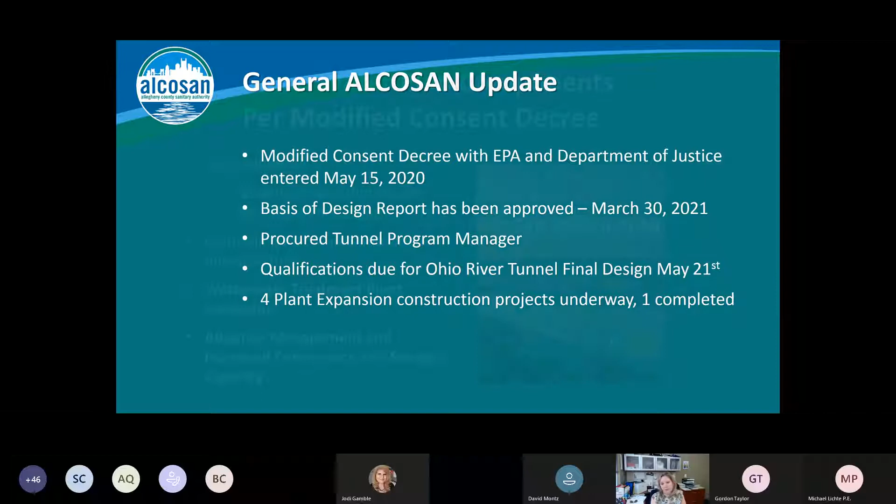And I'm not going to go into too much detail, but you guys know that the Clean Water Plan components are generally split into these 4 categories: the regionalization, controlling the source, and green infrastructure components. Those are not the 2 topics we're going to concentrate on today. The other 2 components, the wastewater treatment plant expansion, and then the adaptive management and increasing the conveyance and storage capacity in our collection system. That's what Mike and I are going to focus on for today's update.

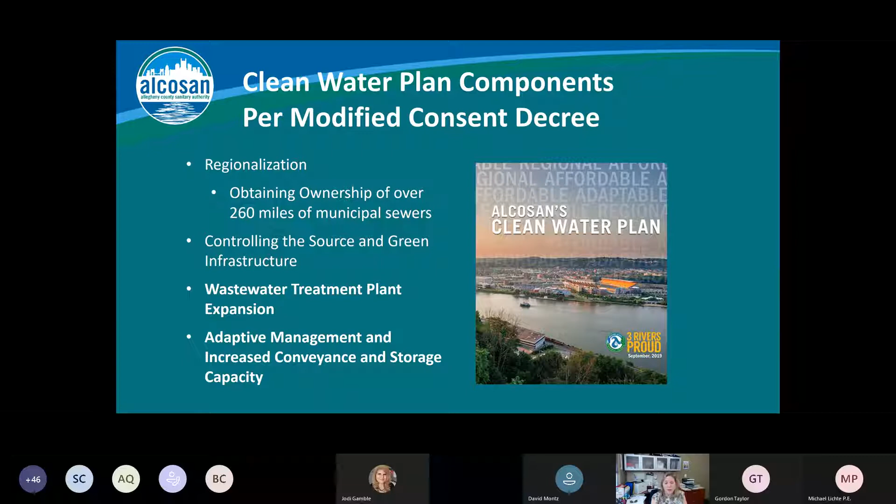But not to ignore that there are two other very important sister components to what we're going to focus on today.

And then just, big picture, what did the modified consent decree do? It bought us 10 more years. We went down to the interim solution based on the affordability limits. But what's important to note here is everything we're talking about, our deadline is the 2036 deadline, but there will be post-construction monitoring beyond that 2036, and then another set of measures to get us to the full compliance.

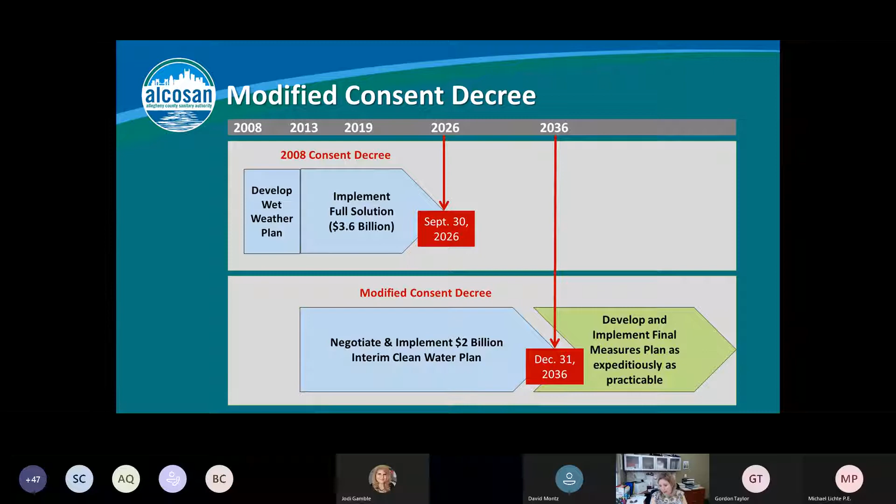Okay, so the treatment plant expansion, lots of construction happening down here at the plant. How will we get there? How will we get to being able to treat 250 million gallons per day now to 600 million gallons per day by 2029?

This is generally big picture how we're going to get there. So we are increasing our secondary treatment plant capacity to get full secondary treatment up to 295 million gallons per day. 2 new final settling tanks, a new chlorine contact tank, and then we're building a river wall about 1,100 feet long to buy us some additional real estate for the construction of those 2 tanks.

Then we have this CSO bypass project, and it will convert our existing chlorine contact tank into a wet weather only disinfection tank. And then we're going to move our outfall. Our current outfall is to the southern end of this tank.

We are moving for hydraulics reasons. We are moving our what will be outfall 002 to the northern end of this tank. And then this will be our everyday dry weather flow outfall. This is a brand new outfall all the way at the northern end of the plant.

We then need additional headworks facilities to bring our headworks capacity between the existing one and the new one up to 600 million gallons per day. We need to have another pump station, and then obviously some new primary tanks.

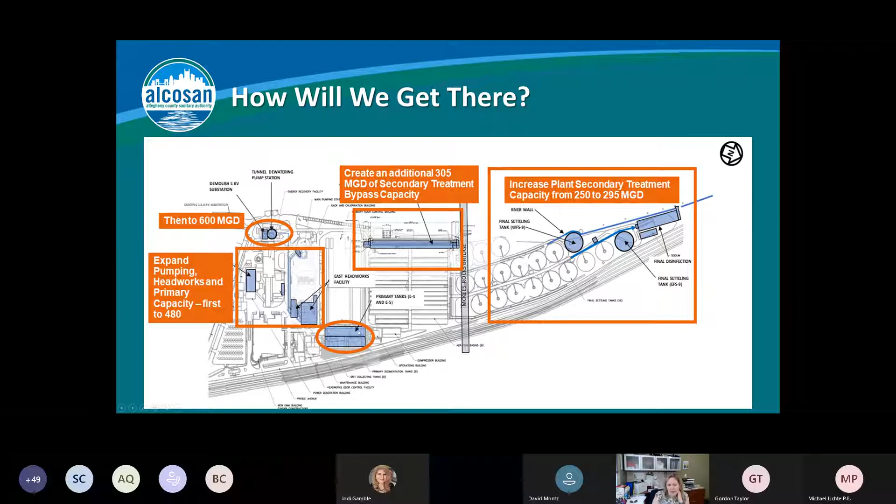So we can't do all of that at once. We simply have to obviously prioritize operations and maintaining our compliance at all times. So we've broken this plant expansion down into final design packages, and this is the way they look.

So package 1, which is under construction right now, is what I described as the 2 new final settling tanks, and then this new chlorine contact tank, and the new building to house the sodium hypochlorite and sodium bisulfite blowers for aeration, and some defoamer for the outfall control. So that was awarded last year, and the contractor got on site about August.

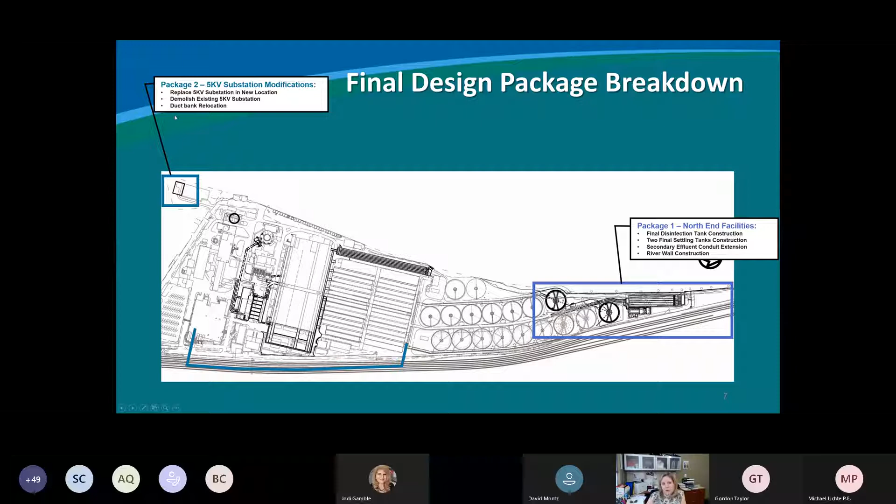Then we also need to plan for the power associated with all of these new improvements. So we have what's going to be called the electrical system upgrades. It is going to be bid within the next 2 weeks, anticipating a July award. And this is really focused on getting in a new 5 kV substation and switching off a lot of loads.

There's a lot of duct bank reroutes in order to make way for new tankage. So it's really like a look ahead project and clearing the pathways that we need. So that's going to be bid here in the next 2 weeks, package 2.

Package 3 was actually comprised of 4 of these smaller projects, but they're small, yet very important. The first one, putting flow meters in the headers, the 54-inch headers of our raw sewage pumps, because we need a way to measure the flow.

Right now, we measure the flow as the flow leaves the primaries into the aeration tanks. We needed a way to measure the flows while this is all under construction, and we also need total flow in the future. Only the flow that's going to get full secondary treatment is going to go this way. The bypass flows are going to go to the chlorine contact tank.

So in any case, this is a pretty important project. And I would say it's about halfway through construction right now. I've got some great pictures that I'll show you in a couple slides. We had to...

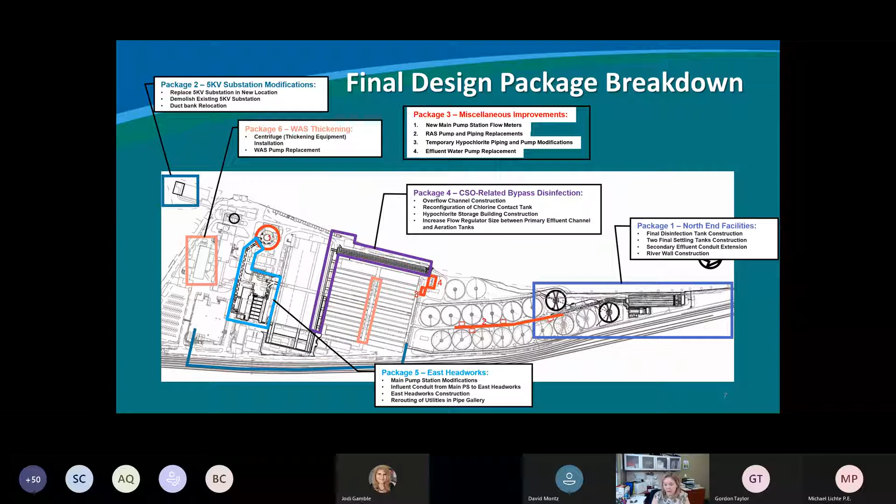Then we're going to have to put out a package to handle our solids. Right now we co-settle the sludge, but we can't do that when we're at those higher capacities. So we're going to be putting in centrifuges that will thicken the sludge. Right now we are working with our program manager to do some pilot testing, and we're going to probably start this fall to understand the performance criteria of the thickening centrifuges that are out there.

In order to build 2 new primary tanks, we have to relocate the lab and industrial waste facility. So I'll show you some renderings of the parking garage and the lab and industrial waste facility. I think it was important for us to stay within our campus. We looked at some other property for the lab, but it makes sense for the lab to be on campus. But since we're completely space limited, we're repurposing our parking lot for our union personnel to be the lab, and then we're going to build a parking garage. Once that's built, we're able to demo these 2 buildings and put the 2 additional primary sedimentation tanks in.

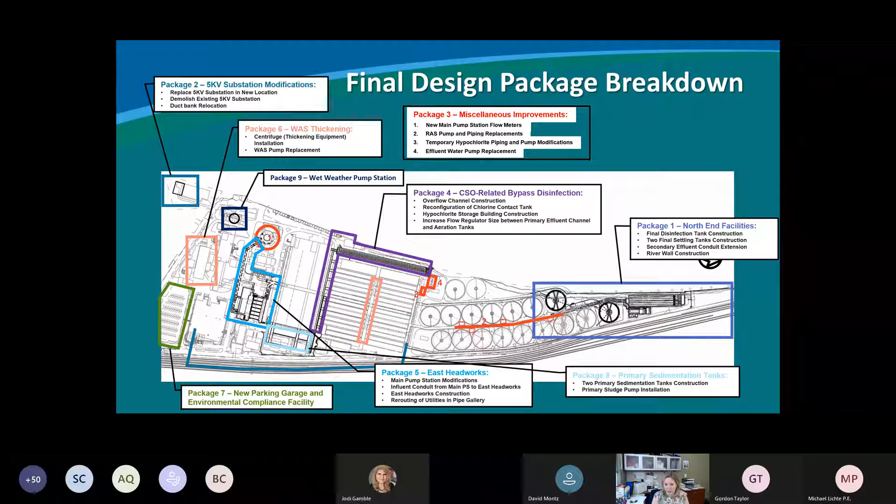And then last, but certainly not least, is the wet weather pump station that's associated with the Ohio River Tunnel. That'll be rated for 120 million gallons per day. And those are the 9 packages that'll get us to 600 million gallons per day of treatment by 2029.

I guess I spoke pretty quickly to where we are on these 9 packages, but this kind of shows you the designs are complete for the north end, and that's ongoing. We are 100% complete for the electrical, and we'll be entering the bid phase here in a week or two. Temporary hypo's done and operational. The flow meters are getting there, and I'll show you some great photos on that. RAS design is complete. Kokosing is the general contractor on that, and we're just getting started and ramping up.

We're going to be doing some pretty intense bypass pumping in order for them to work on those pump stations. The effluent flushing water is getting there. CSO bypass, we just passed the 30% mark where we did a value engineering session, and we're about to come to conclusion on some of the options. East Headworks is complete, a very major milestone. It was just awarded in April, so we're still working through the contracts.

WAS got punted a little bit. We thought we'd put that out this year, but because we want to do some pilot testing on those thickening centrifuges, I pushed that out to the first quarter of next year for the RFQ for the design. The parking garage got awarded in March. The design for the lab and environmental compliance facility will be ready, but we can't bid those both at the same time because they both need to be built on that parking lot. So we're advancing the design for the environmental compliance facility, but then we're just going to pause that and get our parking garage built. The last 2 pieces that still need to go out for design are those 2 new primary sed tanks and the wet weather pump station.

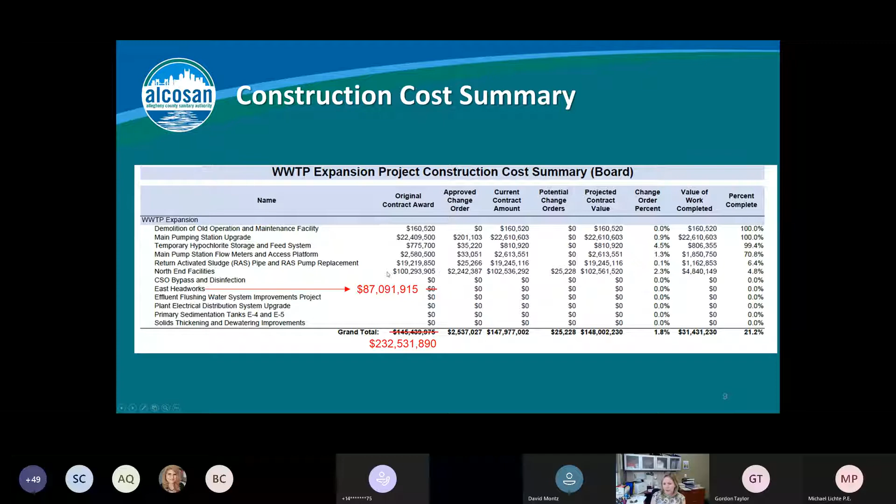Here I have a couple more slides with photos. If you've ever volunteered for the open house or been down at the plant, you would remember those really large sodium hypochlorite storage tanks all the way at the north end. They're all gone now and it's all cleared.

This will make way for the two new final sed tanks and a really long new chlorine contact tank along the river with our outfall, which will be all the way at the northern end of our property. We also had to take out 11 mooring cells.

Those mooring cells were old railroad mooring cells that were, for lack of a better word, gifted to us when we bought the property 20 years ago. We never used them and didn't need them, so they had to be demoed, which made for some interesting work in the river.

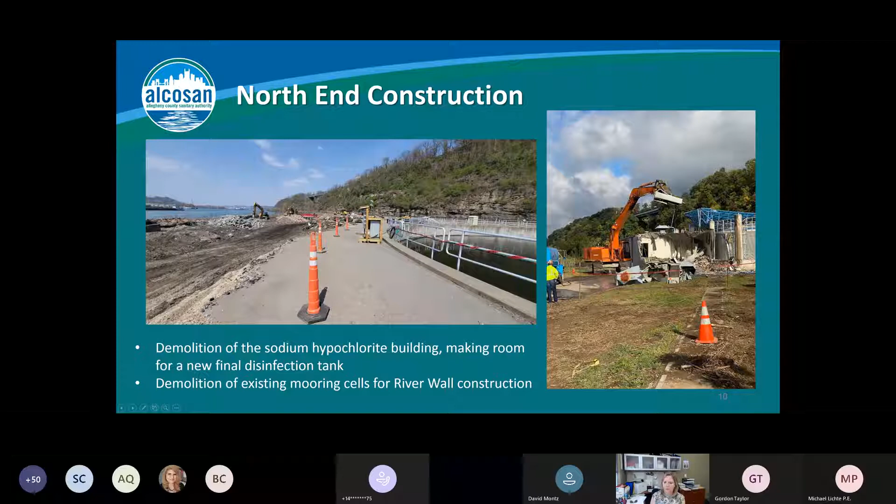This is the flow meter I was telling you about. This is the long 54-inch riser pipe, and it's the only place the flow is pumped at the main sewage pump station at our plant. From here on out, it flows by gravity. We have 6 of these giant risers, and they were encased in concrete.

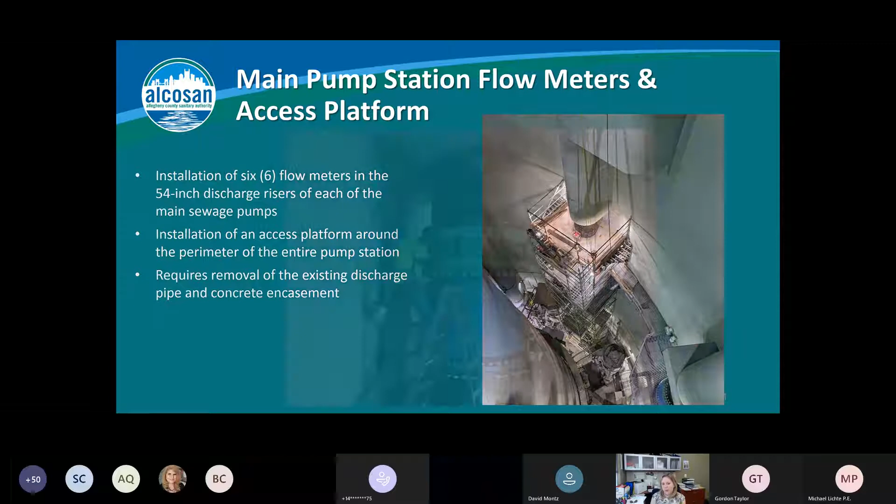The contractor has to chip away at this concrete in order to install these 54-inch flow meters and build an access platform to get to them, since there was no reason to have an access platform in the middle of the riser pipe. This is what it looks like once installed. It's slow work, but it's a very important project.

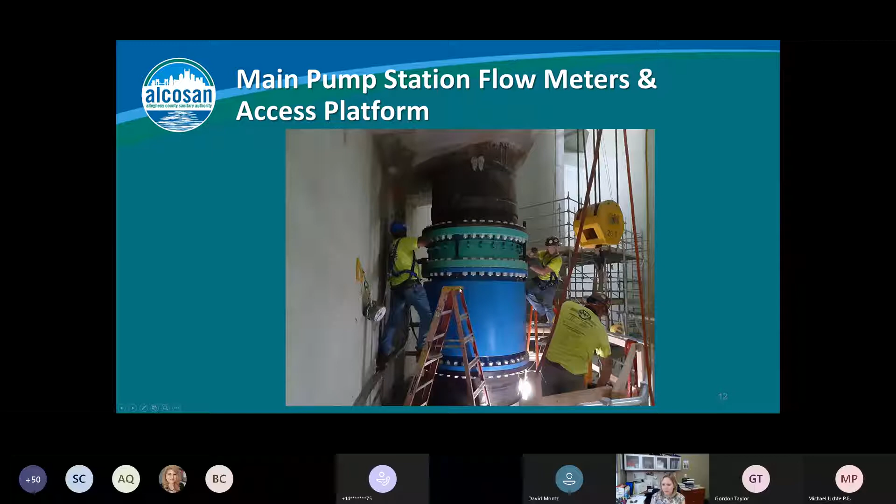This is our rendered version of what the East Headworks facility will look like. Right now this is just an empty parking lot. We demoed our old operation and maintenance building a couple years ago, and since then it's just been an empty parking lot. But this is where the new East Headworks facility is going to go.

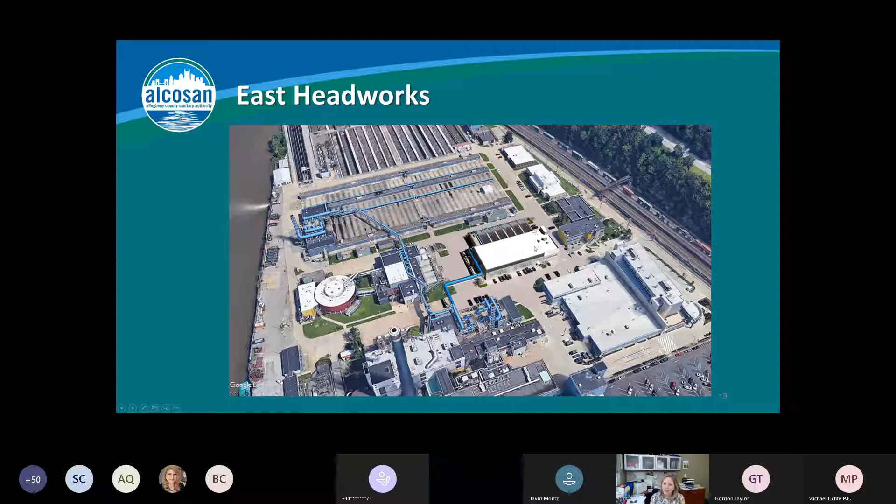These will be the new grit tanks. Between our existing screenings and grit tanks and this new facility, that will get us up to 600 million gallons per day. This is a nice rendering of the way it'll look after it's built.

We had to go through some pretty rigorous permitting with the city because of the square footage of this building. It took us into a whole other set of permitting requirements, but we made it through, and we're looking forward to getting these contracts executed and issuing notice to proceed for the East Headworks.

Here is what I was talking about with the parking garage and the environmental compliance facility. As you enter the plant, here's the security station, which many of you might be familiar with. Just to the left is where our union personnel park. In the future, it will be a parking garage that you see to the left as you enter the plant, going through security.

Behind that will be our lab building, forever known as the environmental compliance facility, because the lab will be on the first floor, our industrial waste personnel will be on the second floor, and a third floor of offices.

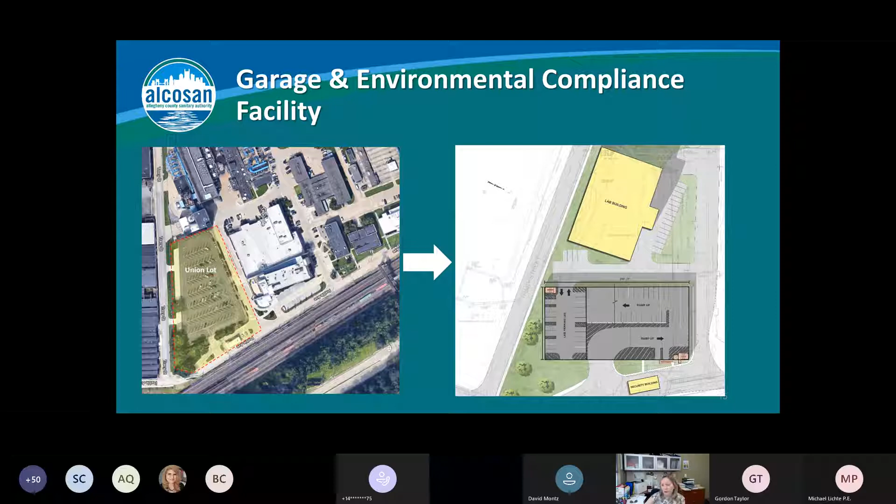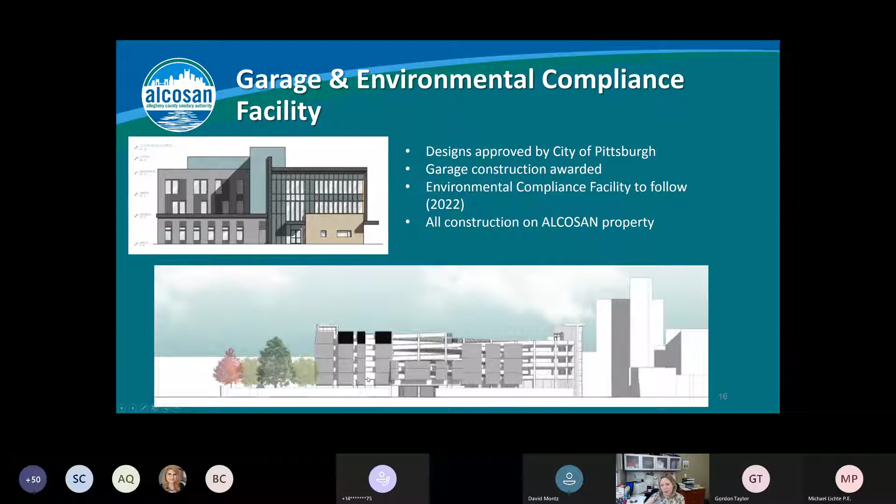Here is a rendering of the lab, and this is a rendering, even though it's a little fuzzy, of the parking garage. The parking garage was awarded, and the general contractor got notice to proceed last Friday. So that is proceeding pretty well.

So with that, I think I'm going to turn it over to Mike now to talk about the work outside of the plant that's been progressing.

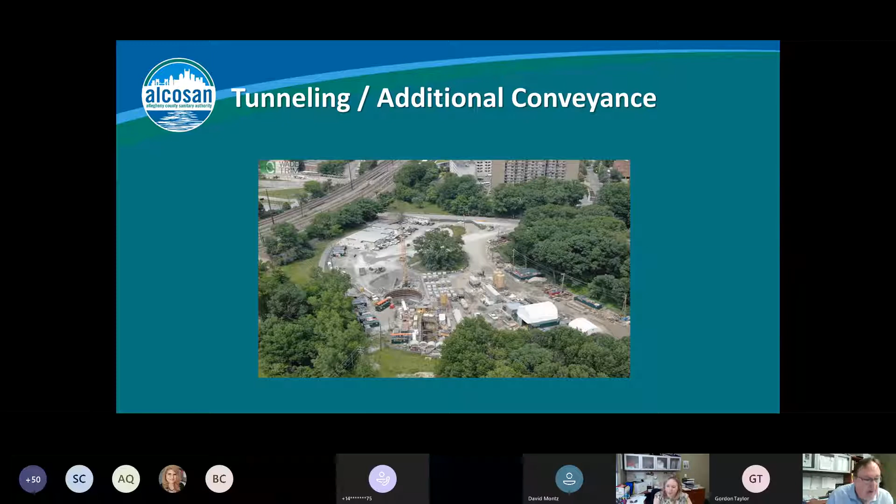You can go to the next slide. As Kim stated, our basis design report was approved March 30th, 2021. There is a plan for new conveyance tunnels and associated facilities, about 16.4 miles of tunnel, to be precise.

Wade Trim came up with recommendations regarding the size and alignment. We moved some things around to save on costs and changed some sizing to accommodate surge. There were additional analyses performed during the process that culminated in the submission of the report. We also integrated data from the wastewater treatment plant expansion, as well as the GROW programs, to optimize the facilities and reduce overflows.

Something on the overflows: by 2036, we're going to be transitioning from roughly 9 billion gallons in a typical year down to 2.7 billion gallons in a typical year. There are some pretty large overflows out there, and these facilities are intended to pick them up and address them. The basis design report provided a basis for us to transition into final design.

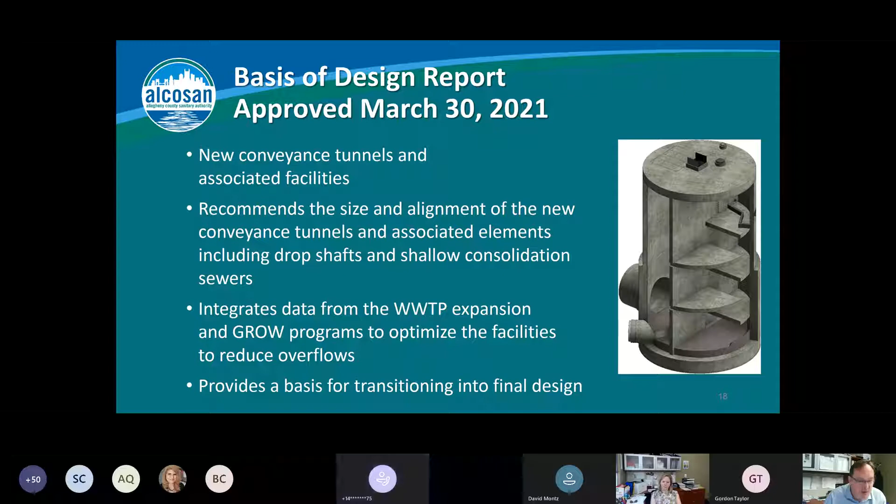The tunnel construction, the Ohio River Tunnel, is broken into 3 segments. This was part of the basis of design report and the alternatives analysis. It's broken into 3 segments primarily because when you start getting into mining operations beyond a certain length, they become inefficient because you end up having to mine and bring the muck back to your launch point. So for these reasons, we came up with 3 packages, roughly 5.5 miles in length for each.

The Ohio River Tunnel is supposed to begin construction in 2025. The Allegheny River Tunnel is supposed to follow up in 2028, and the Mon River Tunnel is supposed to begin on or about 2030.

New regulators, consolidation sewers, about 25,000 feet of new consolidation sewers, drop shafts, and adits. These adits will bring flow from the drop shafts and connect the flow to the tunnel facility.

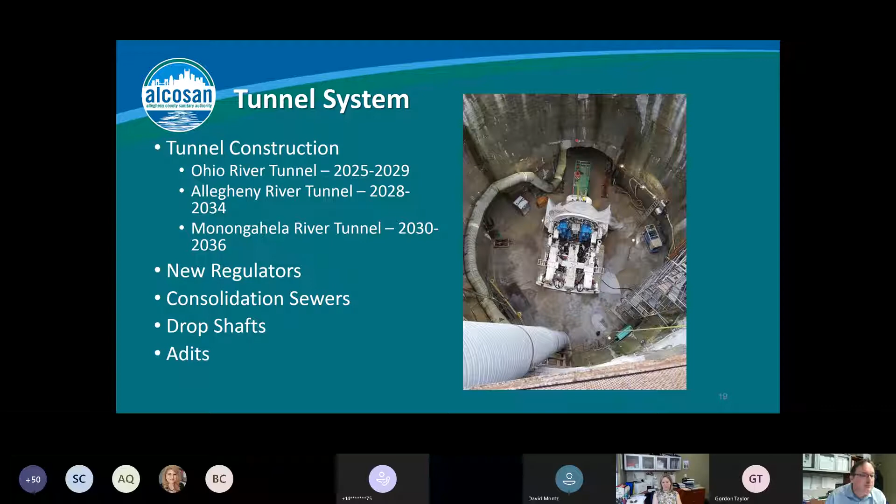As stated previously, we have 3 tunnel segments, roughly 5.5 miles in length. These tunnel segments, as you notice, are 18-foot diameter. We were originally proposing a 14-foot diameter, but because of the surge analysis - and when I say surge analysis, basically what you're trying to examine is how air movement travels in your tunnel - there's some pretty large overflows up on the upper Allegheny, and these tend to drive air.

The tunnel, when complete, is going to be delivering in certain circumstances upwards of 3,000 MGD. It's an 18-foot diameter facility, and it's going to be driving air considerably, so we have to plan to manage this air so you don't create geysers. With that, there will be a couple tunnel relief outfalls just for emergency purposes to mitigate any surge impacts you will encounter.

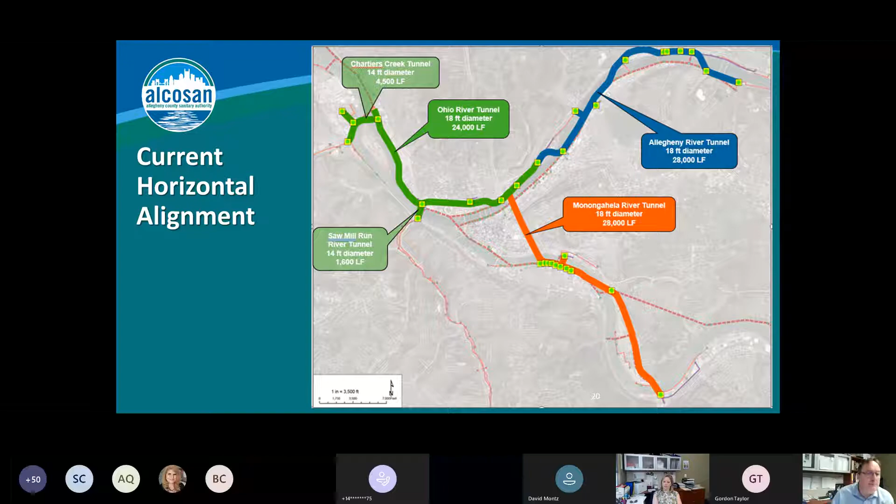As stated, we've done some geotech work. We've done approximately 74 borings in 3 phases along the tunnel alignment. These borings go up to 400 feet deep, and what we're trying to do is basically understand what kind of bedrock we're going to be in.

The tunnel at the wastewater treatment plant and the wet weather pump station is going to be roughly 150 feet deep. So we're going to be in sound bedrock for the most part, but we do have to understand where zones or areas of low compressive strength rock are. This is for purposes of ensuring that we have adequate safety protocols in place and that we have specified the correct mining equipment. We've also done a pretty exhaustive search of historical borings.

We've collected a number of historical borings - you can see those in yellow, the small yellow dots. There's about 1,704 historical borings that we've collected. Some of these are from Route 28, a lot of the bridges like the West End Bridge, for example, West Carson Street. Some of this information is from the North Shore Connector project. So there's a lot of historical boring information that we can use and leverage to complete this work.

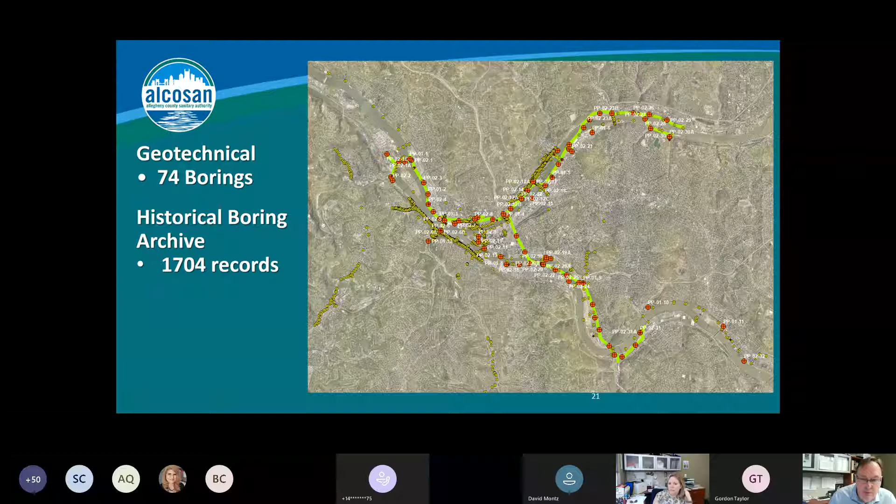This is an existing profile. As stated previously, we're going to be about 150 feet deep at the lower end, at the wet weather pump station. That's going to be located inside the fence. As Kim stated, that's a 120 MGD wet weather pump station. For the most part, we're going to be 40 to 50 feet below our existing interceptor and in sound bedrock.

However, we're going to have to construct a number of shafts to connect combined sewer overflows, large combined sewer overflows, to this tunnel. So these shafts can be pretty large, and they're going to have to be sized to convey flows that you're going to experience in places like Negley Run.

What else can I say? Again, 18-foot diameter. Ranges anywhere from 100 to 150 feet deep, depending on where you're at.

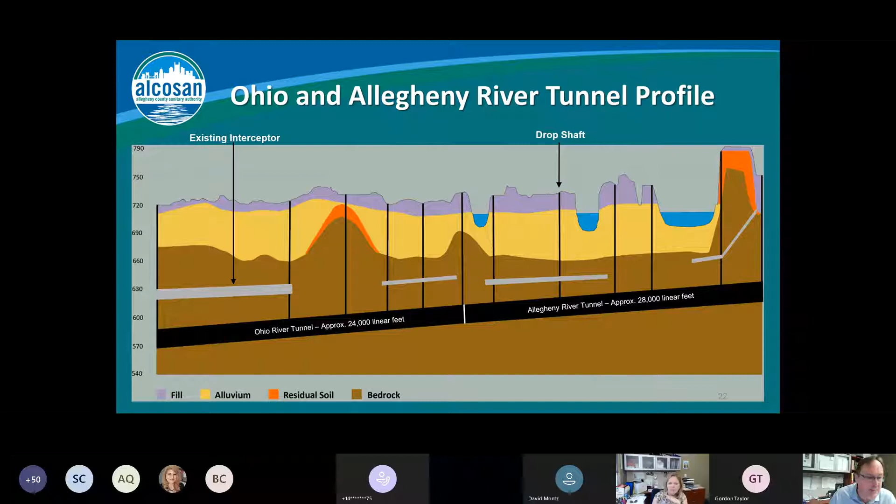We've done some pretty exhaustive geotechnical analyses, looking at things like unconfined compressive strength of rock and rock quality designation, trying to understand what we'll encounter as mining progresses. We'll go through areas of claystone while tunneling, which can have unconfined compressive strengths of 2,000 to 3,000 psi, while surrounding sandstones can be 12,000 to 13,000 psi. So in certain areas you need to know these parameters as you're laying out your geotechnical program.

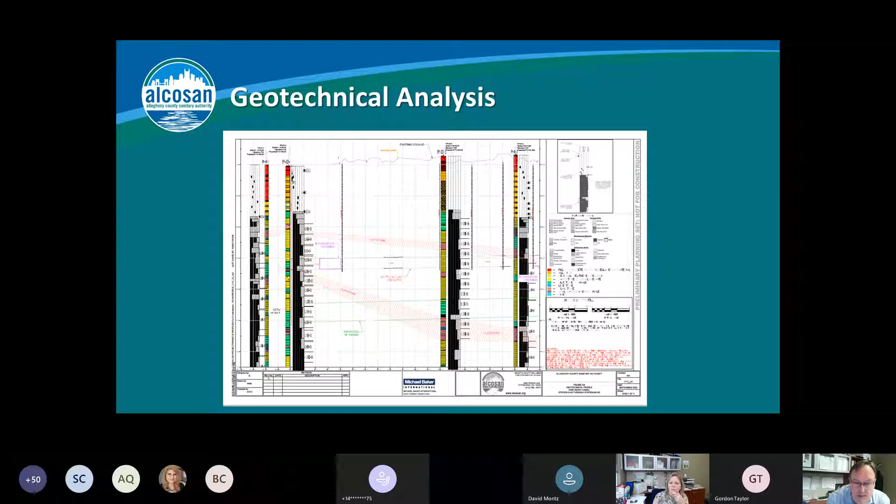As part of final design, we'll have to develop a geotechnical baseline report to provide to the tunnel contractor. This will be a roadmap for him to conduct this work, beginning in 2025.

For tunnel construction, we looked at this with Wade Trim. We'll also have the tunnel PM and final designer weigh in, but we think we're looking at a fully shielded TBM. For those who don't know, that's where the TBM's trailing gear has a shield around it, so you don't have water inflow or rocks falling in on you.

We looked at whether to do a 2-pass, basically a concrete liner following the TBM excavation, or a 1-pass, which is a bolted segmental liner. We looked at this from a cost and safety standpoint and settled on a 1-pass gasketed segment liner. If you search TBMs you'll see these - precast tunnel segments set in place as the cutter head and TBM advance.

We'll have some groundwater control, might have to do some grouting ahead of time. We'll have some mined drill and blast adits - particularly Saw Mill Run is being considered for this, which may have some ribbing and rock bolts while you drill and blast. Basically, in a drill and blast operation, they set charges in the rock and mine out, similar to what was done during the existing Alcosan deep tunnel construction. For Chartiers Creek, we're evaluating a TBM versus drill and blast.

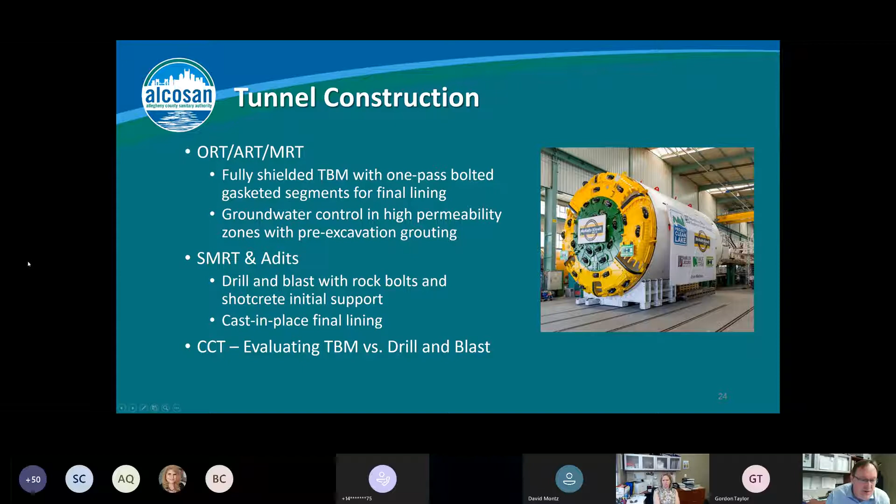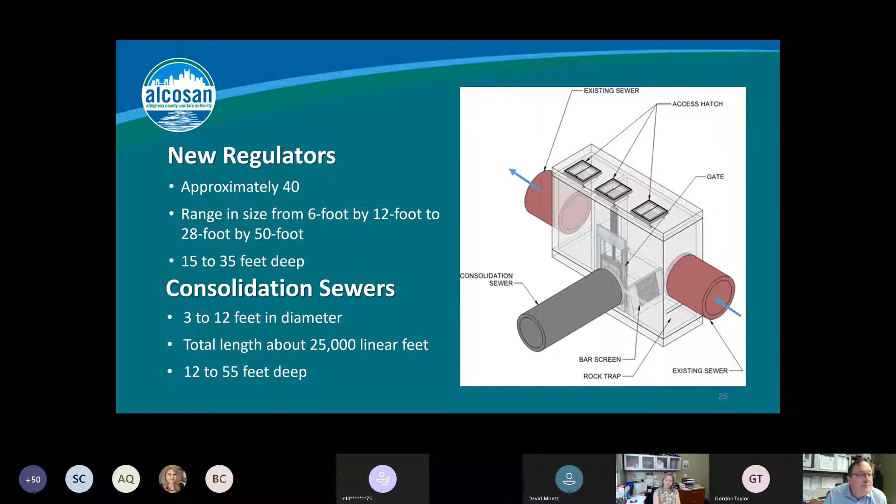Drop shafts, approximately 20, of various types, from baffle to tangential inlet to a vortex insert for smaller combined sewer overflows. Diameters range from 3 to 40 foot. Some of these larger CSOs are driving the diameter because you have to convey, in the case of Negley Run, upwards of 1,000 MGD through this drop shaft.

Adits, typically 8 foot finished diameter, ranging from 50 to 2,000 lineal feet.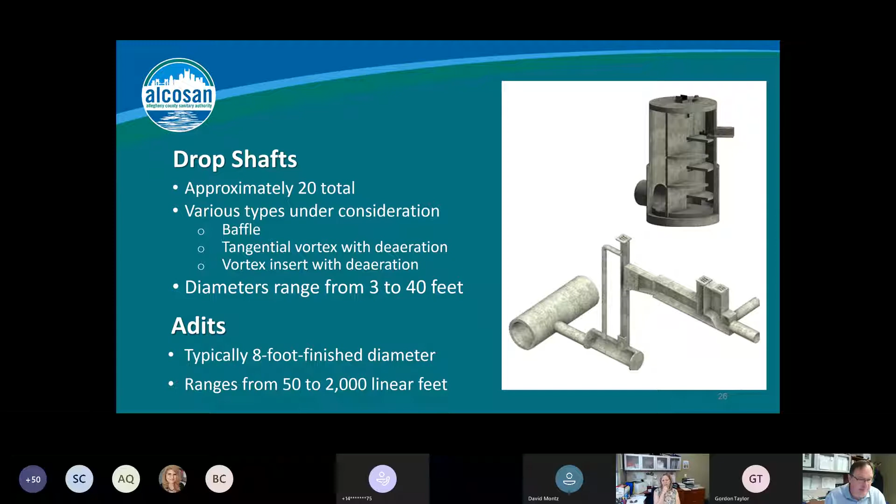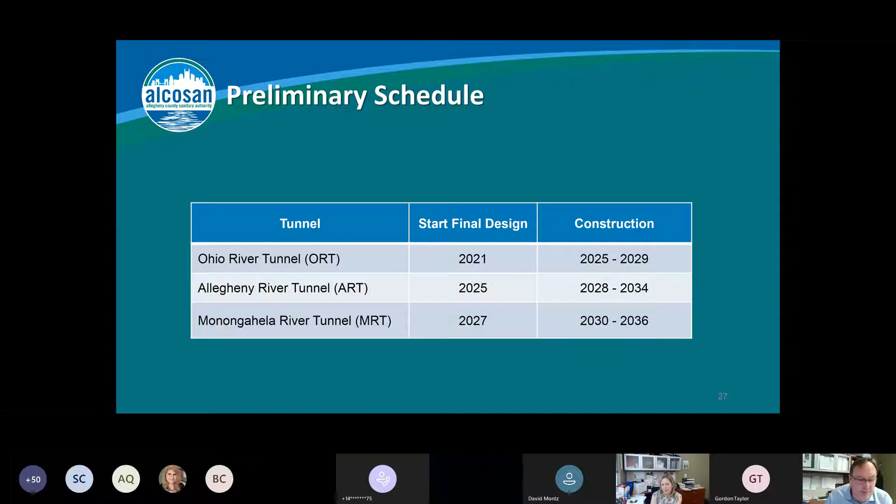We built in, during our consent decree negotiations, opportunities for adaptive management, meaning that flow reduction agreements and changes to municipal loads or peak flows can change the design.

Unfortunately, for the ORT, I think a lot of this has left the station - a lot of this activity has already progressed. But particularly when negotiating the CD, we were looking for adaptive management to kick in during the Allegheny River Tunnel design as well as the Mon River Tunnel design.

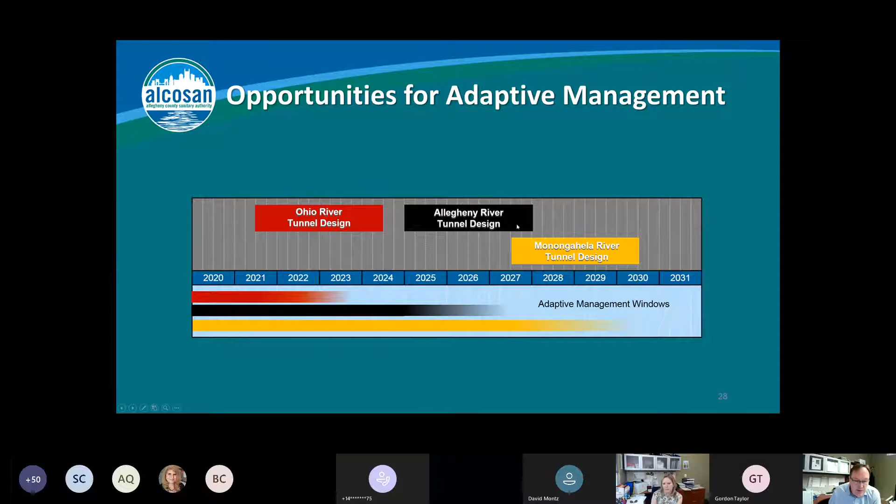Thanks, Mike and Kim. It was very informative and just shows how this is really what we've talked about in the past, a regional approach. It's not just work that you're doing or work that municipalities are doing, it's work that we all do together.